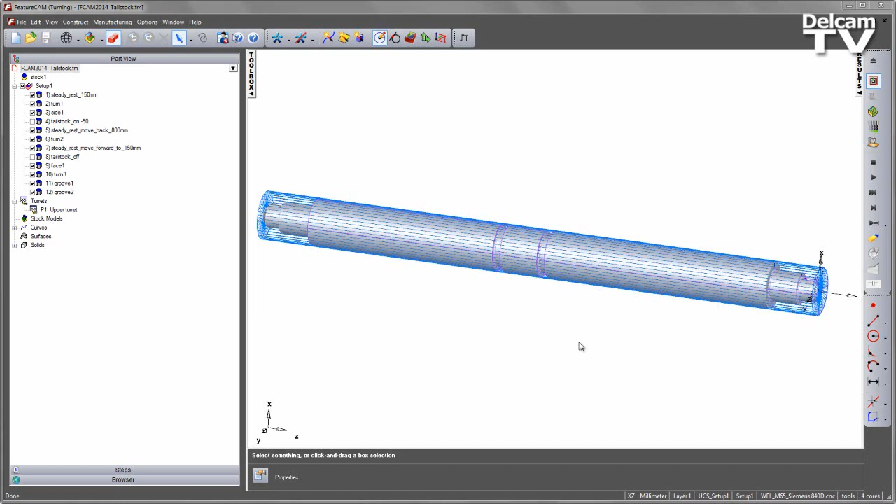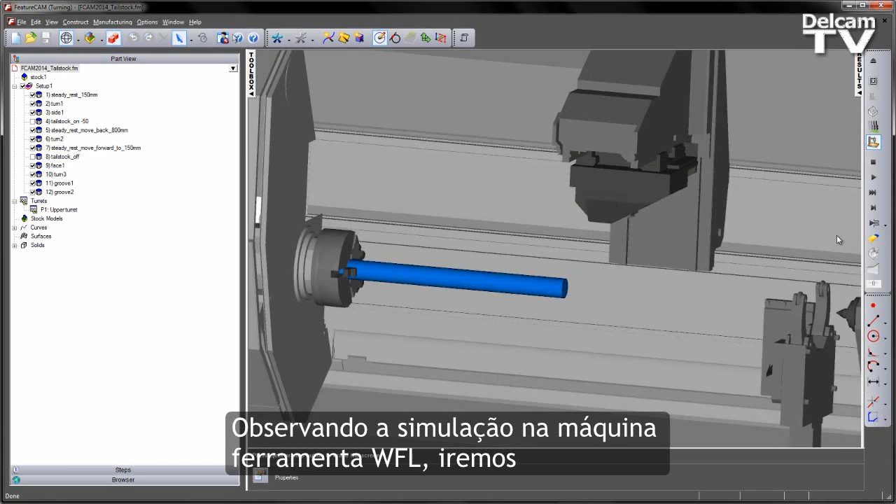FeatureCAM 2014 now supports the programming and simulation of tailstocks. In this particular example, we're leading on from the previous example where we added the steady rest to this process. If we look at this as a simulation on the machine tool, you can see here I've got my WFL machine. I'm going to step through each operation.

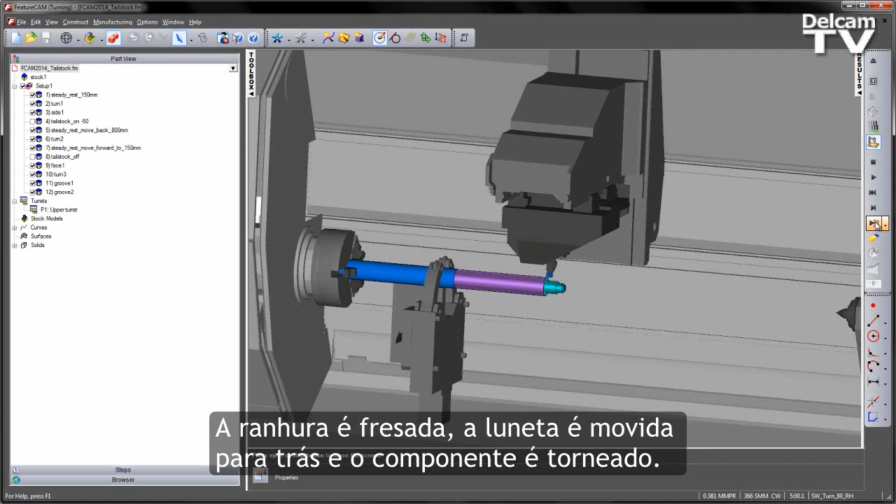So first the steady rest comes in and supports the end of the part. We then do some initial turning at the front. We then mill the slot, move the steady rest back, and then we continue to turn the component. Once the steady rest is back in this position, we want to really support the front of this job because of the length of the part.

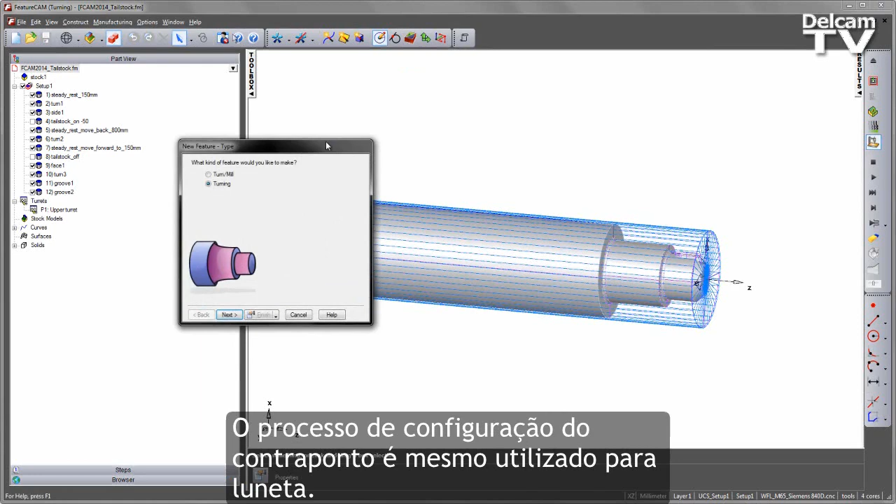To do this, we're going to bring in the tailstock. The tailstock is designed to support long parts by simply coming in and holding the part on center. To generate the tailstock, it's exactly the same process as we use for the steady rest. So we go to Turning, Part Handling, we're going to select Part Support On, and in this case the position, I'm going to position this at -50.

This is because it's a hydraulic tailstock and we want to position just in front of the job before we extend the tailstock in to touch off at the front of the component. Let's choose Next. From the pull down list I can choose what kind of support I want to do. In this case I'm going to select the tailstock.

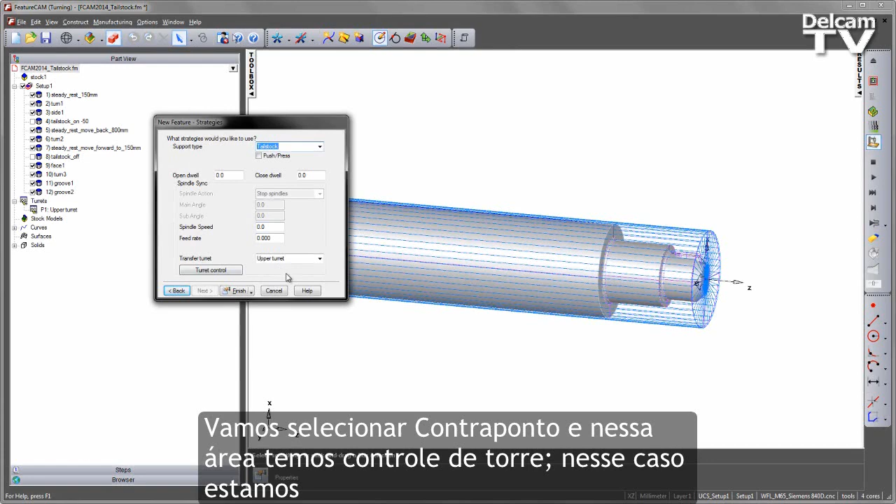And also note the turret control. In this case we're using the upper turret because this is a single turret machine. But we could also, if we wish, under the turret control, if we had a second turret, add a tailstock on a turret position. In which case you need to make sure that the indexing location is the same position as where your tailstock is located on the lower turret.

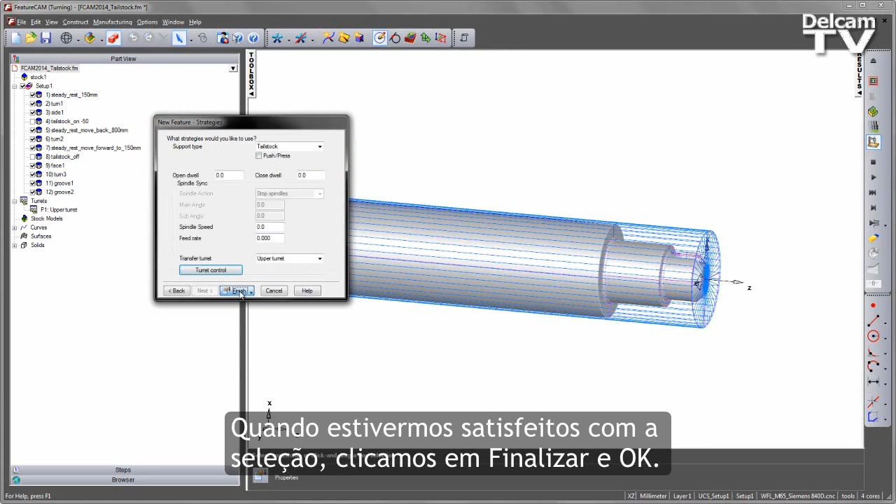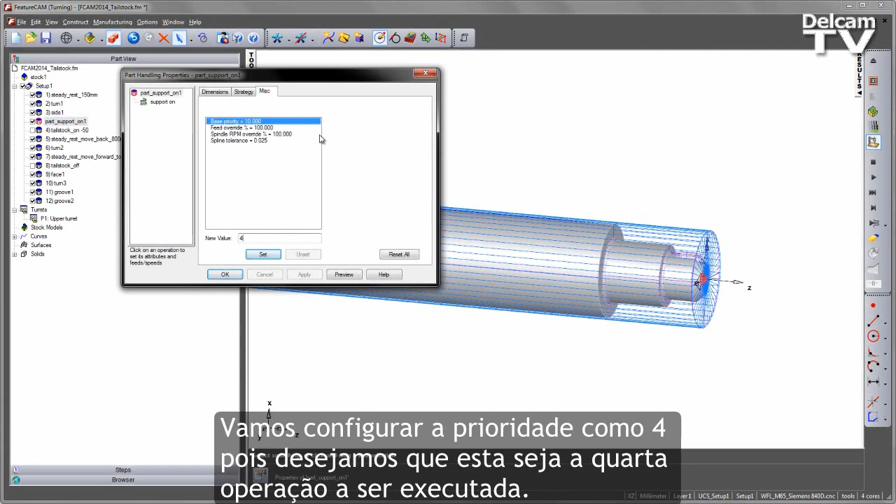Once I'm happy with my choices, I can choose Finish and say OK. I now have a Part Support On operation, which I can move up the tree. In this case I'm going to position it just above the existing one where we have the tailstock, and note the number is going to indicate the priority position. So I'm going to enter 4 as my priority, as I want this to be the 4th operation that happens.

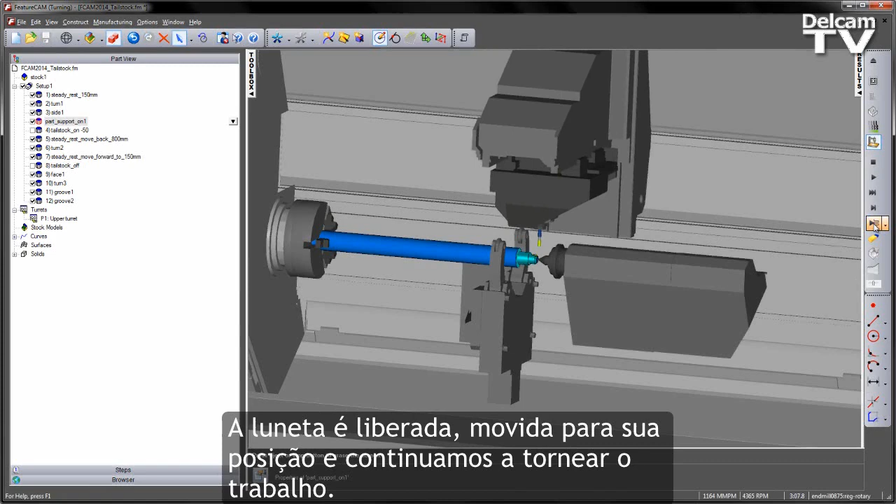We can now play through the simulation to see what we've got so far. So again, the steady rest will come in and support. We turn the front, mill the front. Now the tailstock comes in and positions. We can release the steady rest, move its location, and continue to turn the job.

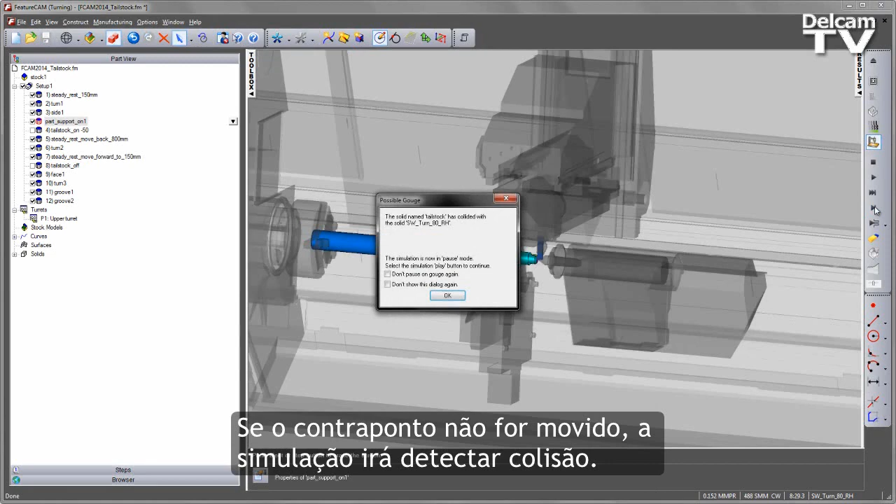We now need to move the tailstock because it's no longer required for the rest of our machining process. It's worth noting that if I don't move it, it is fully collision checked in our simulation. So let's go ahead and send it to its home position. Exactly the same process in terms of a turning operation. Select Part Handling. This time I'm going to choose Part Support Off, and then from the pull down list I'm going to select Tailstock to send it home.

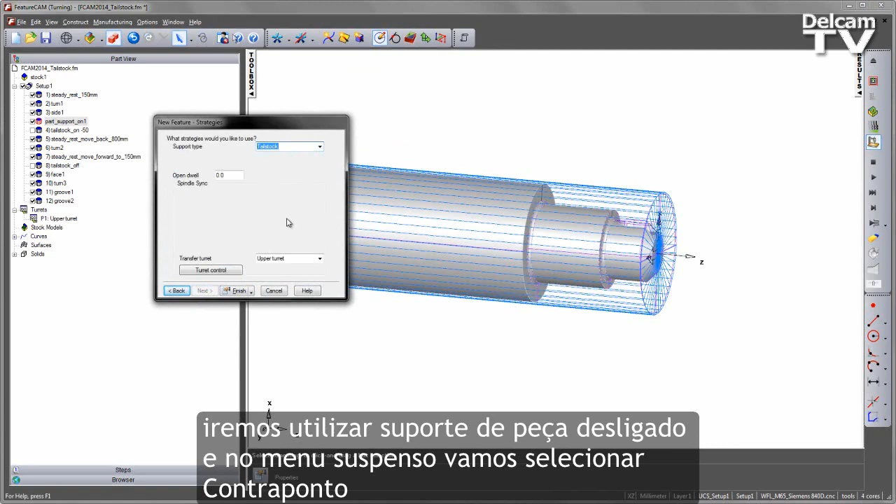I can say Finish. Move its location to just after when we bring the steady rest into position, and again note the example is number 8, so we can go ahead and change the priority to be 8. That will now remove the tailstock, ready for the rest of the operations.

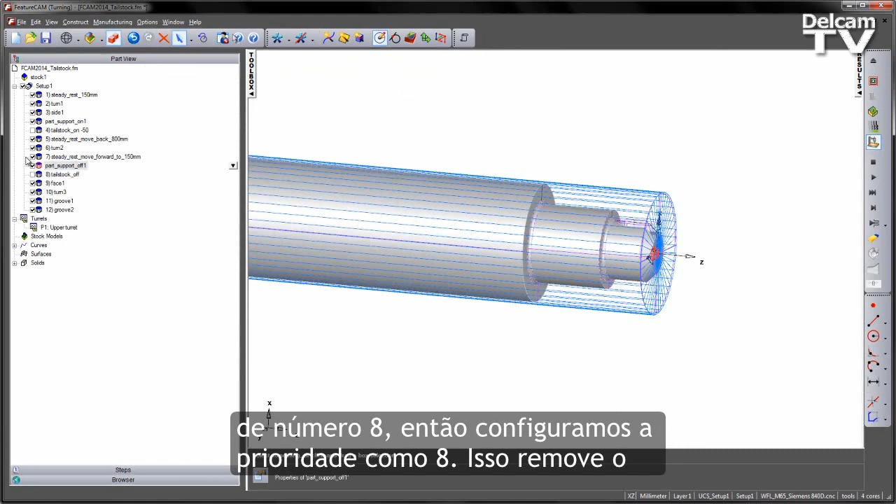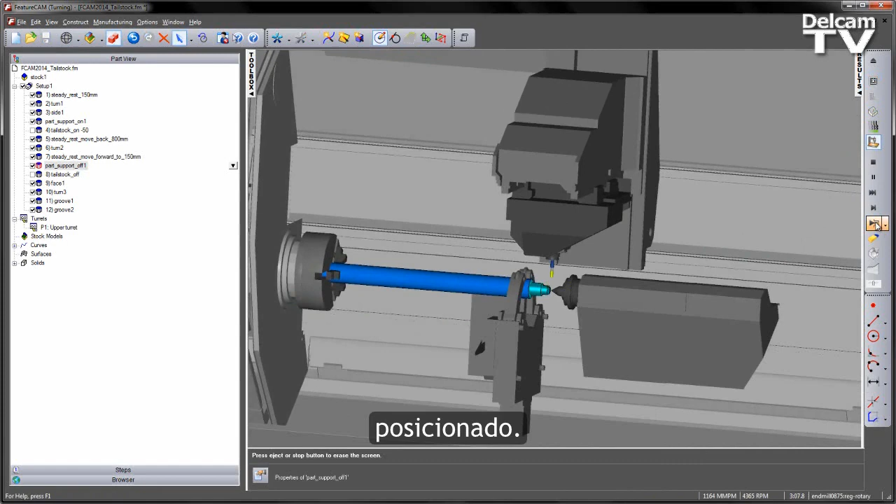So once again let's watch the simulation. Steady rest comes into position, we turn the front of the part, do our small amount of milling, bring the tailstock into position. Now we can move the steady rest, turn the front of the part, move the steady rest again.

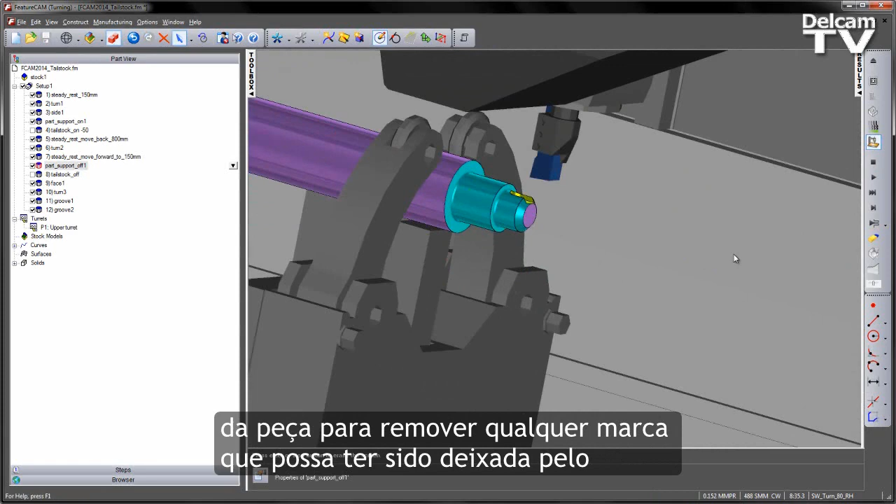Now we can send the tailstock home, and in this case we've got a facing operation just at the front of the part to clear any marks that may have been left by the locating position of the tailstock. We can now play the rest of the operations to finish our component.